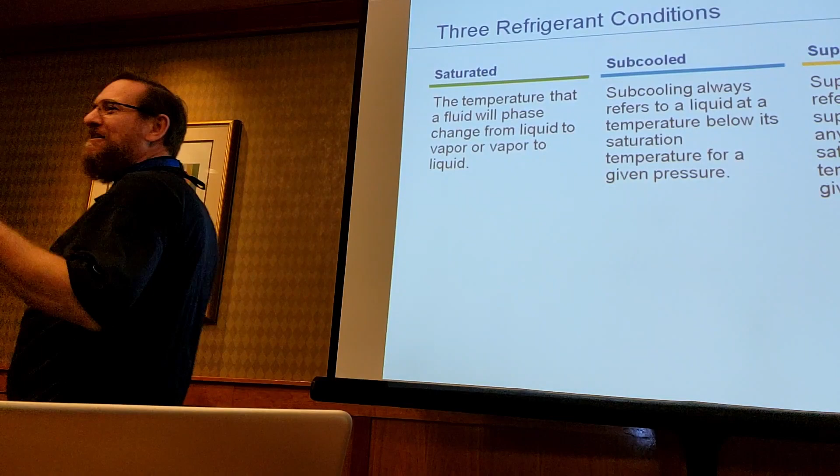Talking about saturated, subcooled, and superheat. Saturated, the temperature a fluid will phase change from a liquid to vapor or vapor to a liquid. So when I say saturated, what's the first thing that comes to your mind? PSIG converted to temperature. That's the first thing. Kind of a trick because the words didn't match it. When I'm saying saturated temperature, PSIG converted to temperature. When I'm saying pressure, saturated temperature. So that's the most important thing.

Saturated is probably the most beautiful word in HVAC. It means so many things. It's the most overlooked. We're going to have subcooling. Refers to a liquid at temperature below saturation. I'm going to go into more detail in a minute. And superheat always refers to a vapor. Superheated vapor is any vapor above its saturation point for a given pressure. And saturated. Saturated means PSIG converted to temperature. Also means where there's liquid and vapor together.

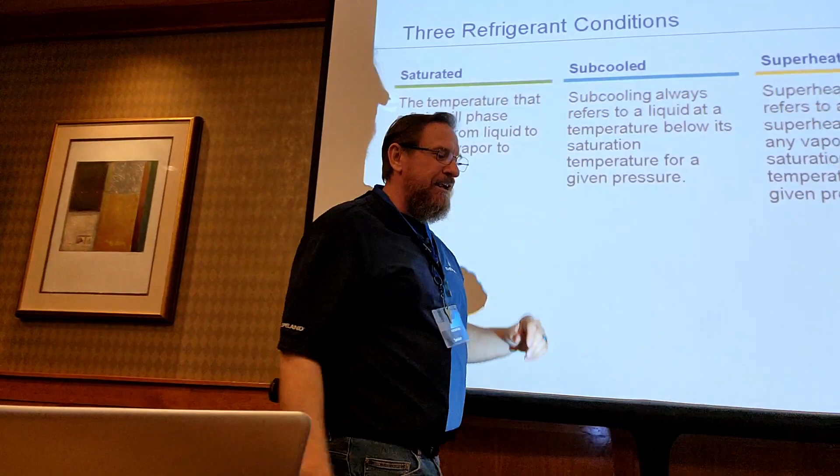Where do we have liquid and vapor together? Condenser, that'd be liquid saturated. Do we have another saturated? Evaporator, suction saturated. Now, is there any other place that we deal with saturated? Metering device. Oh, it's good, because after the metering device it is saturated, so that's a good one. Not what I was looking for, but that's a great answer. What about the tanks you keep in your truck? Is there a liquid and vapor in that tank? Oh, in the cylinder. Yes. If there's liquid and vapor in that tank, what's it going to be?

Saturated. PSIG converted to temperature. It's also change of state, from a liquid to vapor, vapor to liquid. It's also latent heat. It's one word that means all these great things. Liquid and vapor in contact with each other at equilibrium, pressure and temperature tied together. That's where that PT chart's going to come in. For this example, we have 290 PSI gauge. Is that number going to be relevant to me? No. So we're going to convert that to a saturated temperature, 404A converted to a saturated temperature. What does that come out to?

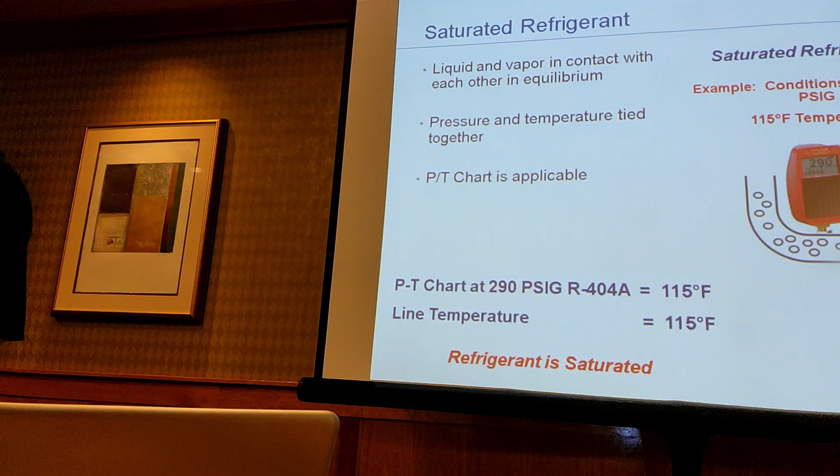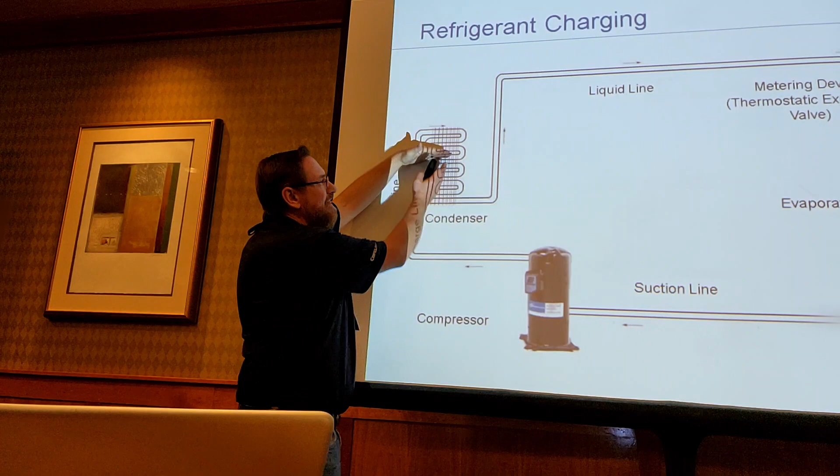115 degrees Fahrenheit. Our actual line temperature is what? 115 degrees Fahrenheit. So what are we at? Saturated, liquid and vapor together. Do we want it to be saturated coming out of that condensing coil? No. We need liquid coming out of it. If it's saturated here and we're also saturated in the actual line, that means there's liquid and vapor. I don't have any liquid. This temperature should be lower than my saturated temperature. We need to subcool it.

Can you drink a subcooled liquid? Yeah, sure. Let's give an example. R718 right here. What's the saturated temperature at 0 PSI gauge of this water? 212. The saturated temperature of this water is 212. That's where it boils. I have a temperature pressure chart that says this boils at 212. What's the pressure in this room? That's 14.7 PSI, but in gauge it would be 0 PSI gauge, and it boils at 212.

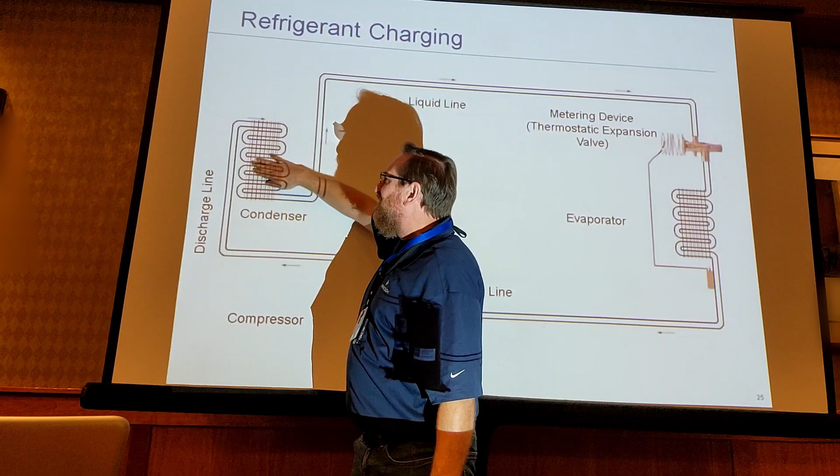What's the temperature of the water in this room? What does that thermostat say? 69? Round it to 70 degrees. The actual temperature of the water is 70 degrees, but it boils at 212. What's 212 minus 70? 142, close enough. You can see that it's subcooled below its saturation point. Is it at 212? No, it's subcooled below that. So we can only drink a subcooled liquid. So it's going to be saturated in the condensing coil, saturated in the evaporator coil.

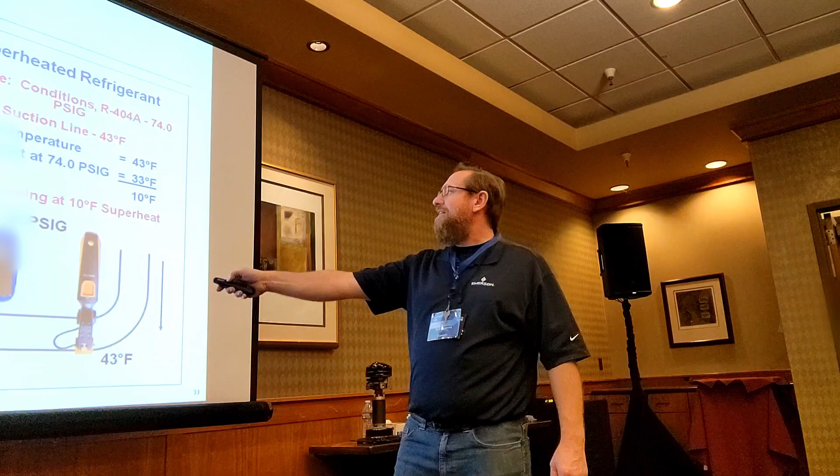Now let's talk about superheated vapor. Here we have our pressure gauge hooked up to the line, and our line temperature, 43. Now here we got 74 PSI gauge. Do I want that number? If you call me and say, hey, Ty, I got 74 PSI gauge, what am I going to do?

Probably going to hang up on you, no offense. I got things I got to do. I got classes to teach.

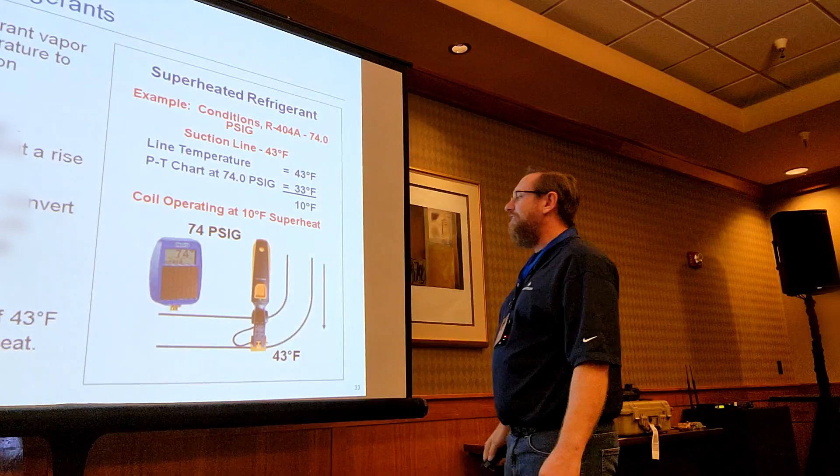74 PSI gauge, 404A. That converts to a saturated temperature of 33. The actual line temperature is at what? 43. So if it boils from a liquid to vapor at 33, can we heat it up above 33 and have it still be a vapor? Yeah. Now it's sensible heat. 33, 34, 35, all the way up to 43. What's the difference between 43 and 33? 10. So it's superheated 10 degrees.

Can you breathe a superheated vapor? Sure. It's the only type that you can breathe. You can only breathe a superheated vapor. Let's give you an example. Somebody get their phone ready, you're going to have to Google this. I got my camera and I can't Google this. So what is the boiling temperature of oxygen? Like negative, I forget, something. Somebody look it up real quick. Siri or Google or whatever's popular today. That's the boiling temperature of oxygen.

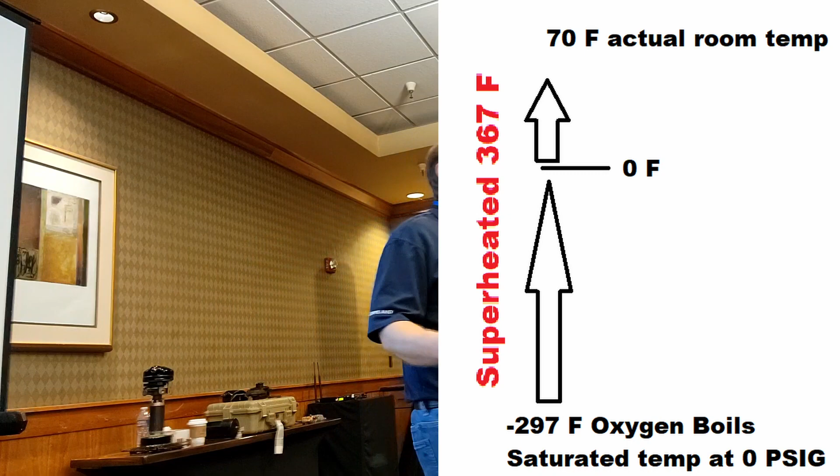Minus 297. That's at saturation temperature. At 0 psi gauge, the saturation temperature is minus what? 297.3. Is the temperature of this room at that? If the temperature was, it'd be liquid and vapor. Or if it was below that, it'd be liquid. The temperature of this room was at 70. So what? 70 minus 297, which we add them together.

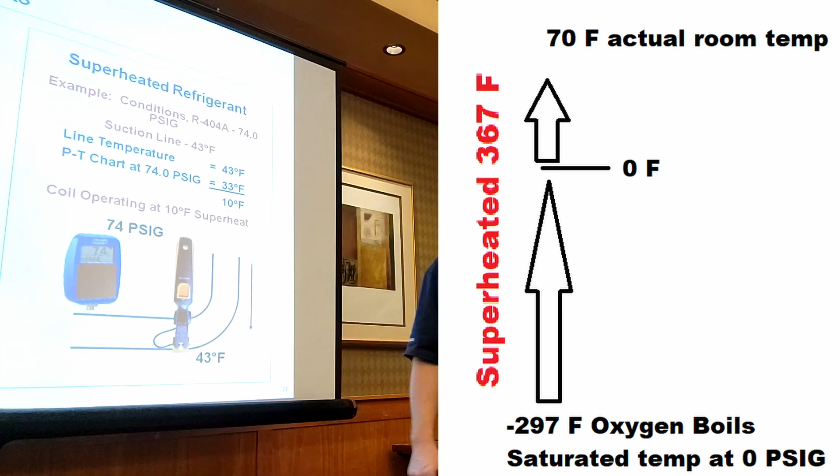So we're breathing oxygen. It is superheated, something degrees above its saturation temperature. We know what it changes state at, minus 200 and something, and its actual temperature is going to be much higher than that. So we know we're breathing in superheated vapor. What happens if you breathe in liquid oxygen? It's probably going to freeze in your throat, right? You're going to drown. It's not going to be good.

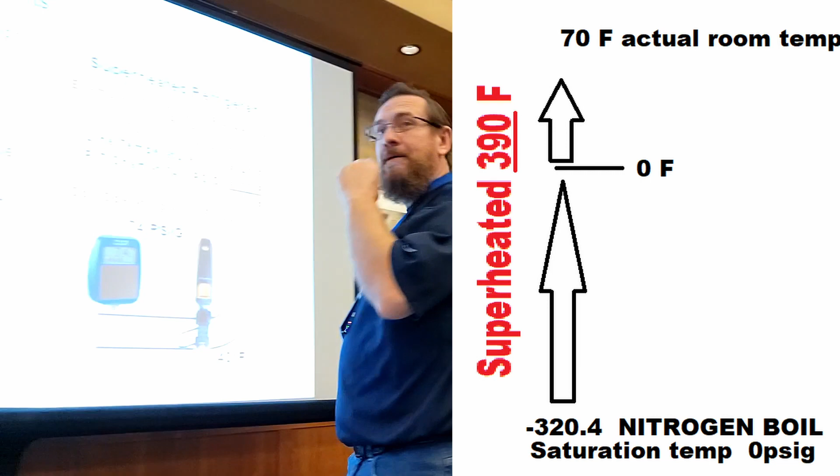But we also breathe what else? What's the other thing that we breathe? Nitrogen. What's the boiling point of nitrogen at 0 psi gauge? Minus 320.4. Let's go to 320. So what's 70 minus 320.4? 390. You're breathing superheated nitrogen. Its boiling point is way lower, but we're breathing it as a superheated vapor. This compressor can only breathe a superheated vapor.

So when we talk about that pressure converts to temperature, that's in the evaporator coil. But this line temperature should always be lower? Should be below saturation? What happens when we're below saturation? Liquids. Do we want it to be below saturation on the suction line coming to the compressor? No, because it's going to be a liquid to our vapor pump. It's going to kill it. What's another option? Higher. We want it to always be higher.

If the line temperature is higher than the suction saturated, it's going to be a superheated vapor. And if I know that I have superheated vapor to my vapor pump, that's a good thing. What if that temperature is below? It's going to be a liquid, which is really impossible to happen because of the science. But what happens if my suction line temperature and my saturated temperature is the same number? You're at saturation, which means there's liquid and vapor together. We don't know how much. Maybe there's only one drop. Maybe it's 99% full, but we know there's liquid and vapor.

What's going to happen to our vapor pump? Bam! Done. It's over. We're going to be having to replace it with another one doing the same exact thing, and then another one, and another one. The refrigeration cycle is so important because I need to know that I have superheated vapor coming to the pump. If I don't, it's not the pump's fault, but it will kill it. We need to look back. Maybe it's an airflow problem with the evaporator coil. Maybe it's my metering device. But it's something we need to look for.

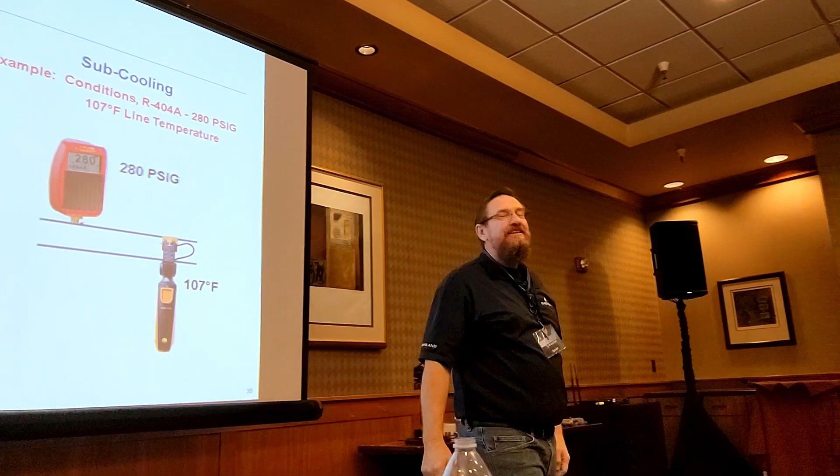PT chart does not apply with temperatures without a drop in pressure. So we got our 280 psi gauge, converts to a saturated temperature, 113. So we got 404A, 280 psi gauge, 113. My actual line temperature is lower than that. So 113 minus 107 is what? 6. It's 6 degrees subcooled below its saturation number.

So if I want this much, this is the opposite. Now we're measuring liquid. Opposite of vapor is liquid. If I want this much liquid, but I only have this much liquid, what does that mean about our condensing coil? We're starved. We need more liquid in that condensing coil. With that bottom few rows, we need to stack some more liquid in there.

So by adding refrigerant, our subcooling will go up. By taking refrigerant away, our subcooling will typically drop. Subcooling is easy because it's directly measuring liquid. Vapor is a little bit more difficult because we have to convert it from a vapor thought into a liquid thought because they're opposite of each other. So far, so good? Still with me? Haven't lost anybody? Hanging on barely? Okay.

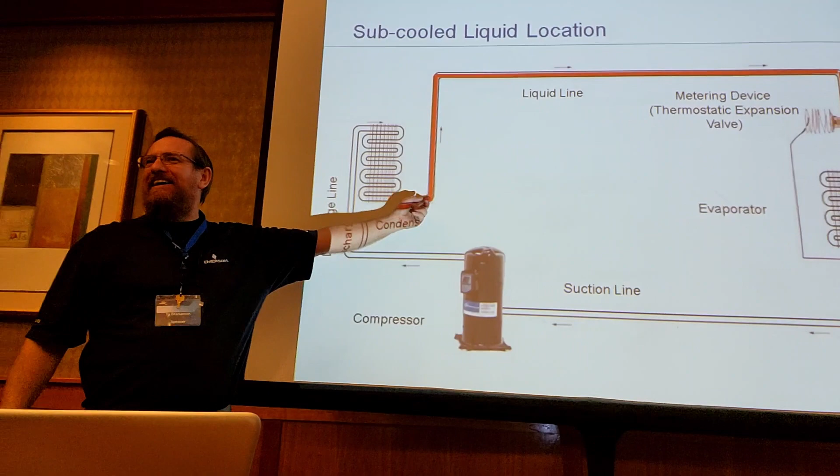So from our condensing coil all the way to our expansion device should be a subcooled liquid. Where does everybody check their subcooling? Here, right? You hook it up right here. There's subcooling coming out of the liquid line. It's below the saturated temperature. What happens if we have a long line set? It's going through a very hot attic or a hot mechanical room. What possibly happens before we get to our metering device?

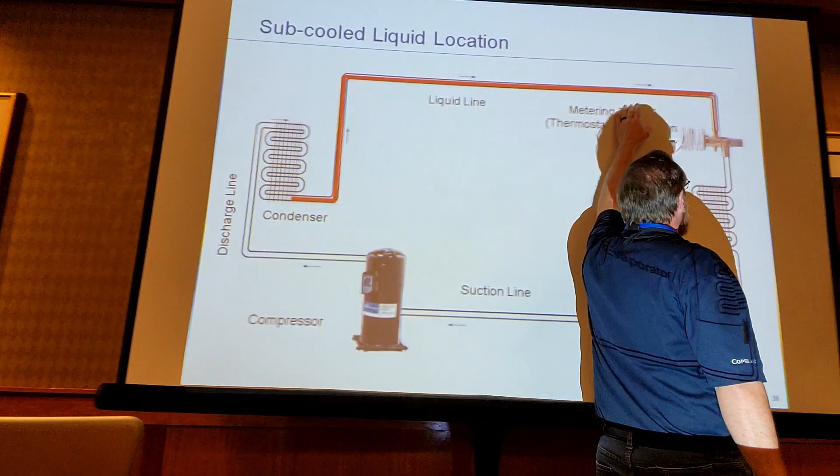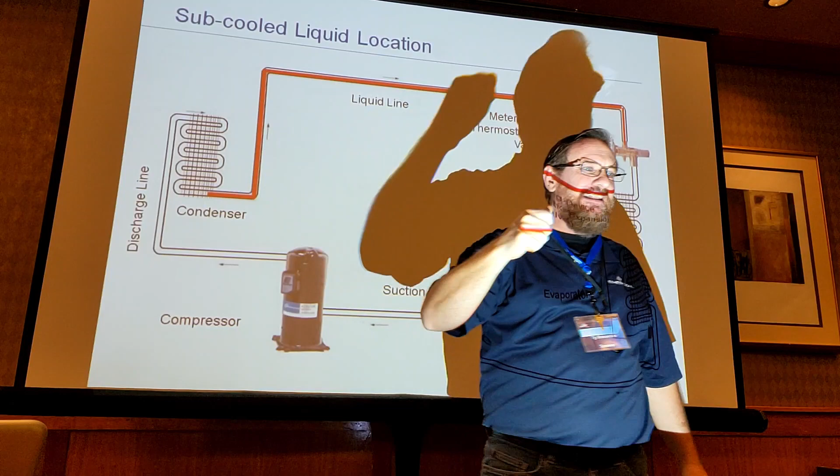If I add heat back to our liquid line, what does our liquid line temperature do? It starts to go up. My saturated is the same, but as my liquid line temperature gets warmer, it's possible for me to lose my subcooling before I get to my metering device. This is why I like to see a sight glass before that metering device so that I can see, do I have liquid coming to that TXV or not?

I've had a lot of problems, especially with these 2-story houses, big attics, no ventilation, and that liquid line temperature. We lose our subcooling before we get to our metering device. We end up at a flash gas, liquid and vapor mixture before I get to our metering device. One of the things to look for.

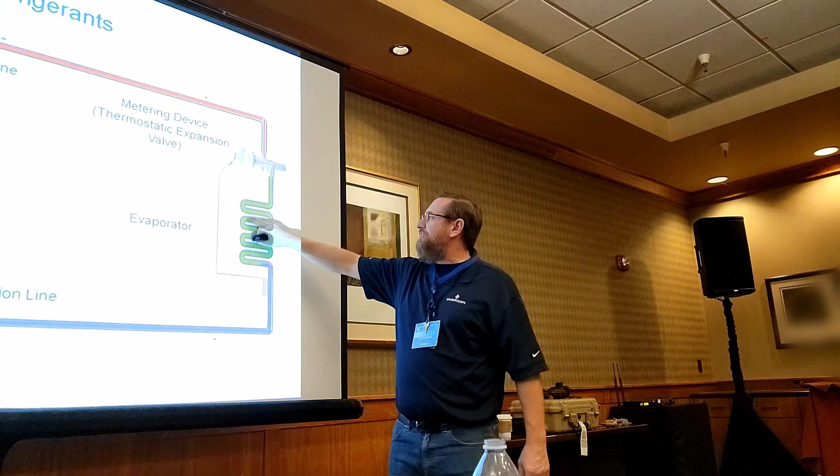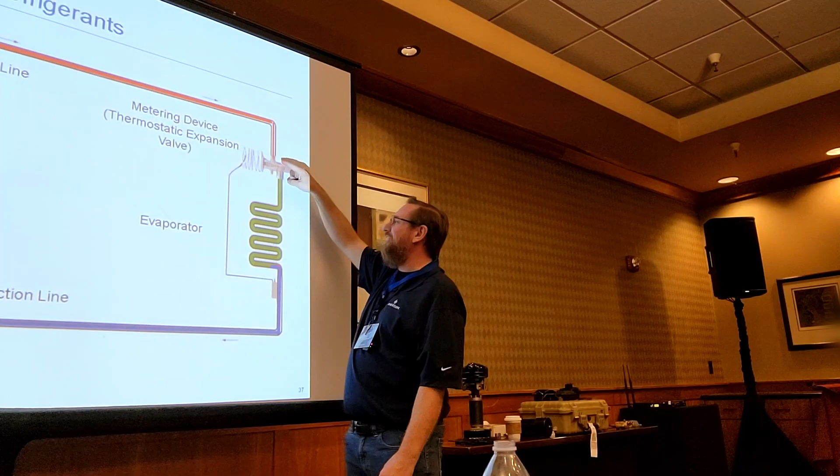Then we end up at saturated, change of state from a liquid to vapor. Then we superheat it, that last little section. We have our superheated vapor coming to our compressor. Here we have our metering device. What kind of metering device is this? Thermostatic expansion valve. What I love about these is, assuming you have enough airflow, their job is to try to maintain the superheat. As long as you give it enough liquid, it will try to maintain superheat for you. You got to give it enough liquid.

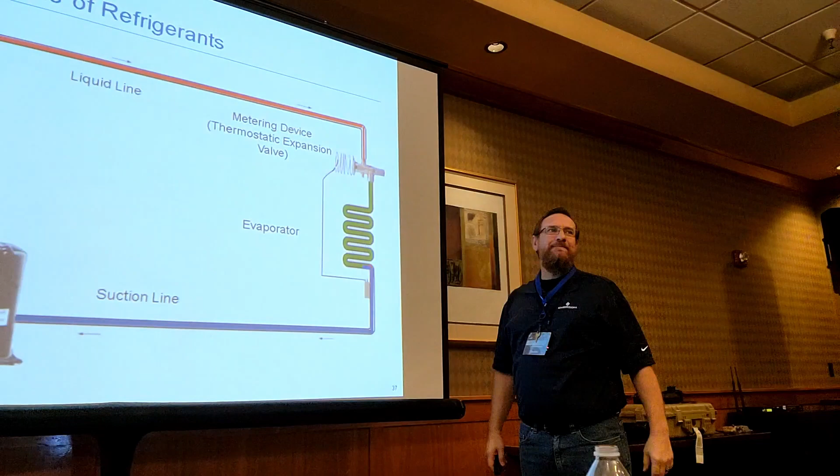If I pay you enough money to do a job, will you do the job for me? If I don't pay you enough money, are you going to do the job for me? Probably not. So if we don't give this metering device enough liquid, it can't do superheat for me. Awesome metering device. It's actually measuring the actual suction line temperature. It's got a sampling hose over here. It's measuring the suction pressure. The TXV is literally measuring superheat.

That's what it's doing. And if you keep the lines clean and you don't overheat this or the sensing bulb while you're brazing it, they last a long time. I have a book from the day of Willis Carrier that's got an expansion valve in there. Like these new expansion valves, man, the technology's been around for a long time. Any questions on superheat subcooling? When you contact any tech support, have that superheat and subcooling because it tells me a lot about what's happening in that system. And have your saturated temperatures ready.

What's the difference between sensible and latent heat? Well, you can feel it. Measurable. You can feel it. Good. What else? Latent is a change in state without a change in temperature. Which is more powerful, latent heat or sensible heat? Good. Saturated, what is that going to be? Vapor and liquid. So saturated, is it going to be sensible or latent? Latent. It's going to be latent.

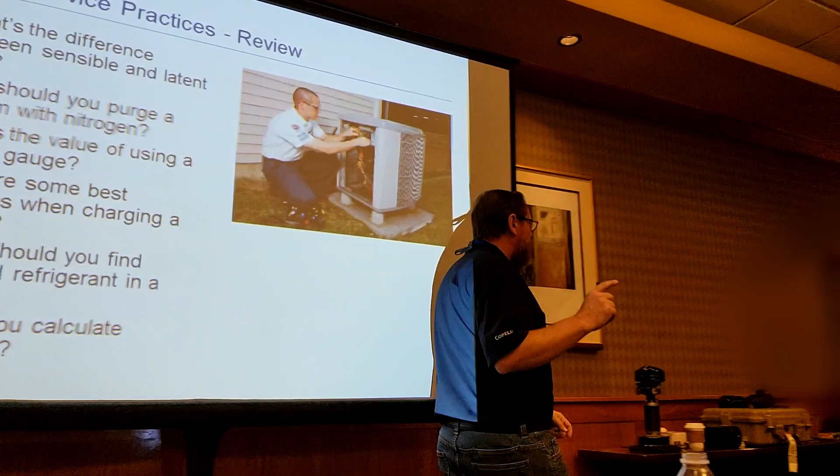In the middle of the condensing coil, is that going to be sensible or latent? In the middle of the evaporator coil, sensible or latent? The actual liquid line in a properly operating system, sensible or latent? Sensible, because we subcool it, we can measure it below saturation. What about the suction line in a properly operating system? Sensible, because we want to sense superheated vapor coming back to the compressor. What about the discharge line coming out of the compressor? Sensible, it's going to be superheated way above the saturated temperature.

Good. Why should you purge a system with nitrogen? Get the oxygen out, get the contaminants out. You're also pushing a lot of that moisture out. You're able to physically push the humidity in the air out by doing that as well. What's the value of using a micron gauge? Dehydration, which prevents acid, which also prevents copper plating, and also non-condensables.

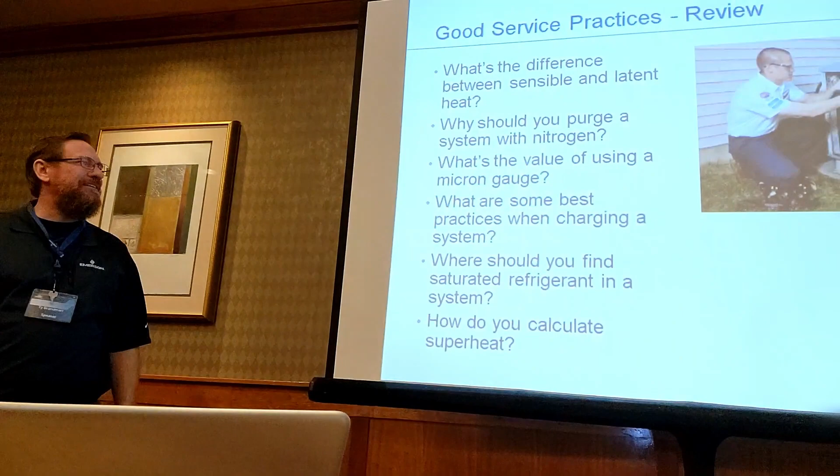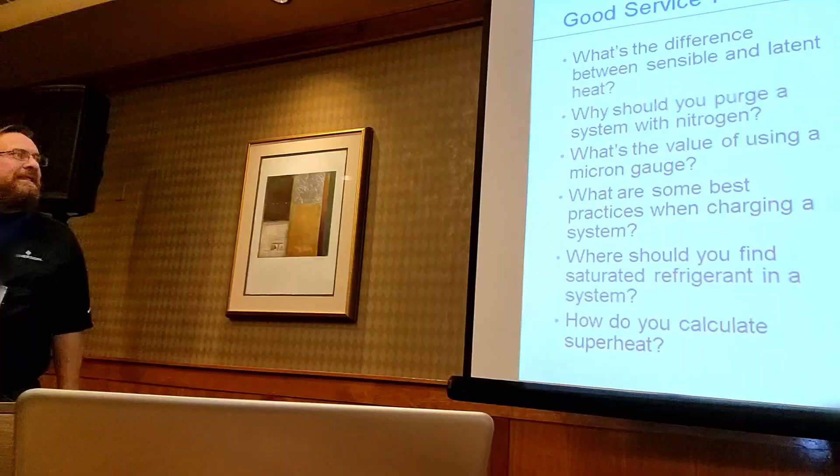What are some of the best practices when charging a system? Weigh it in. That's right. Weigh it in. And while it's running? Throttle in little bitty bits. You can use those little charging devices if you like, but you want to throttle it. If you're going to use that charging device, still watch it, because I've seen people just open it up, and all that charging device is a restricted orifice. That's it. So people open it up and it floods the compressor. And if we're working with a blended refrigerant, which is most refrigerants now, we've got to charge it as a liquid to prevent the cool word that starts with F. Fractionation. That's exactly right.

And where should you find a saturated refrigerant in a system? The coils. Evaporator coil, suction saturated. Condensing coil, liquid saturated. What happens if you have saturated in your liquid line? Your metering device will not be able to meter. Regardless of what metering device it is, it can't meter. It needs liquid refrigerant. Maybe you have not enough refrigerant in the system. Maybe you've got a restriction. Maybe they put more than one filter dryer in there, but you've got some kind of an issue.

Now, what happens if I have saturated on my suction line? That's going to be a dead compressor. Saturated is going to be liquid flood back to your compressor. We don't know how much liquid. We know it's going to be liquid to a vapor pump. That's where we're looking at a bad day. And if you get a negative superheat, it probably means you've got one of the gauges hooked up wrong. It is possible to have a negative subcooling, but it's really not possible to have a negative superheat. You can have zero superheat, which is bad.

And how do you calculate superheat? I like to say it like this: it's the actual suction line temperature minus the suction saturated temperature, your dew point. Why should the line temperature be above the saturated temperature? Because that means it's above saturation. That's right. We should boil it from a liquid to a vapor. It should be a higher number than the saturation point. Questions on that?